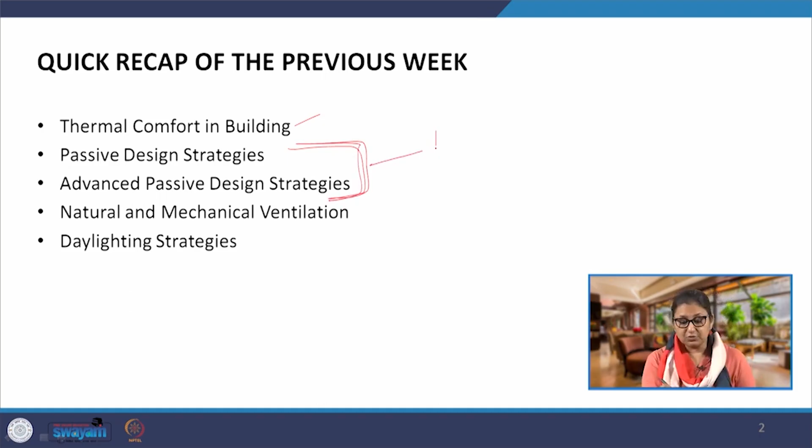Looking at the content of the previous week, we see we looked at thermal comfort, and then at passive design strategies to enhance thermal comfort. So we are talking about enhancing thermal comfort, and what will it do? It will reduce the energy consumption, which in turn will reduce the emissions.

So this is what we are talking about: we want to reduce energy consumption through building design. Now, all this is actually going into scope 2, but scope 2 is tremendous for different types of businesses and companies, as we have already seen in the previous week.

So what we were trying to do through the strategies in the previous week was reduce scope 2 emissions, which directly accrue because of the amount of electricity or different forms of energy that we use.

For example, we might be burning conventional fuel to heat up a building. That could be scope 1 if we are burning the fuel on site, but largely it is going to be scope 2 because most buildings today are run on electricity. So it is either scope 1 or 2.

Then we also looked at ventilation. If we do not have enough natural ventilation, we will be adding mechanical ventilation, or HVAC, to serve both thermal comfort and ventilation requirements. And then we have daylighting strategies. Here, if we are not designing well, we end up using artificial lighting.

All this together is giving us this: we are trying to enhance thermal comfort, visual comfort, or the indoor air quality at large. So we are trying to improve comfort inside buildings, and in the process of doing so, we are reducing the energy consumption in the building.

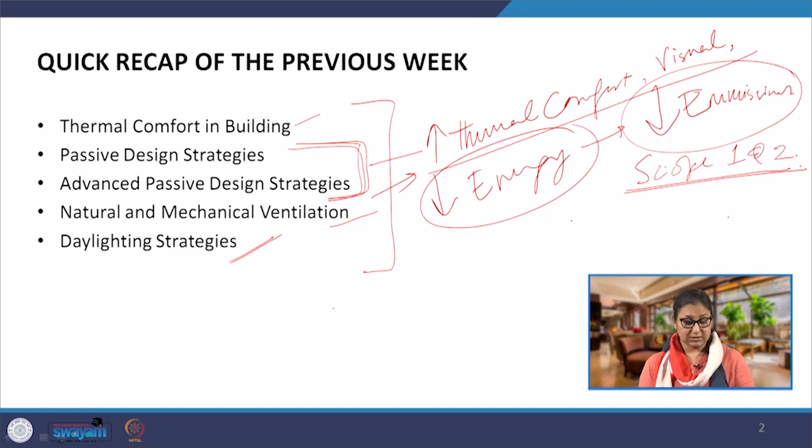But in addition to that, we are also going to see the factors which affect material selection in buildings. Now, these considerations for material selection, and when we go forward and look at low emission materials, we will largely be looking at reducing the scope 3 upstream emissions.

So these are the different materials, the choice of materials that we have. If we select materials which have high embodied energy, meaning they are associated with a higher rate of emissions, all these emissions are going to be counted as part of scope 3.

While the focus of this course is scope 1 and 2, and the calculations are largely going to be on them, we are also looking at this selection criteria of materials so that we can reduce the upstream scope 3 emissions also.

There are several factors which affect the selection of material, and we can broadly categorize them into 4 categories. The most important is the mechanical and non-mechanical considerations. We will come to the details later, but these are the primary factors for selection. Then we also have the economic consideration, which doesn't have too many factors, but primarily these two often drive the selection of materials. Which material to select? We are mainly looking at these two.

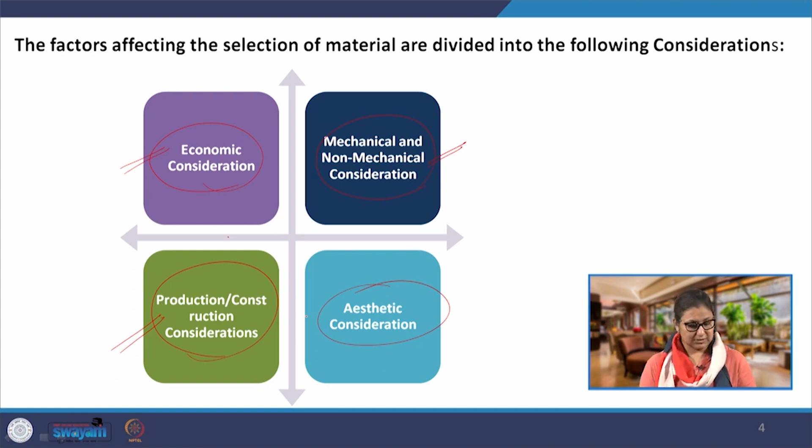If we look deeper into these factors, the most important one is such that without it the buildings cannot function well. So, what we are looking at when we say mechanical and non-mechanical considerations is that we have to check the strength, durability, what kind of maintenance requirements they have, their specifications and their performance, which could be thermal performance, visual performance, acoustic performance. When we say glass, there are varieties of glass available in the market today, but their performance, their visual performance governs which one to use. We have just seen that.

Then we are talking about maintenance. There are certain materials which require a lot of maintenance, and that is why they are not very common in use these days. A lot of materials qualify on many other criteria, but because they require a lot of maintenance, they are gradually going out of the market. People are not preferring materials which require a lot of maintenance. We will come to each of these factors in detail now, but these are some of the factors, and there could be a number of other factors we can include in this list, but these are the primary factors considered within mechanical and non-mechanical considerations.

The second one which we said is the economic consideration. Some of these factors, for example durability, affect the economic consideration too. But if we look at the two primary factors, we are looking at the capital cost of material - how much cost I am going to incur in the beginning when purchasing and procuring that material, which adds to the capital cost of my building. And then we are talking about warranty or guarantee, and this durability actually affects this.

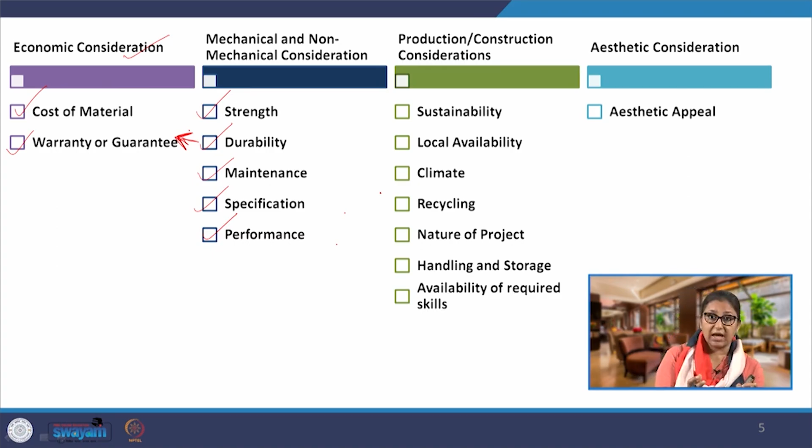If we have a durable material which is going to last 20, 30 odd years, but we have to pay a small premium for that durability, for the warranty and guarantee that comes along with the material, we might find it more economical than a material that stays only for say 2, 3 or 5 years with a slight reduction in cost. So that cost comparison is the life cycle cost of the material. The economic consideration - one could be the upfront cost charged to the person, and the other could be the life cycle cost. We are not talking about the cost of emissions and others, but only during the installation of the material - the cost for procurement of material and then for operations and maintenance. That is the life cycle cost we are looking at, and that will also be an important criteria.

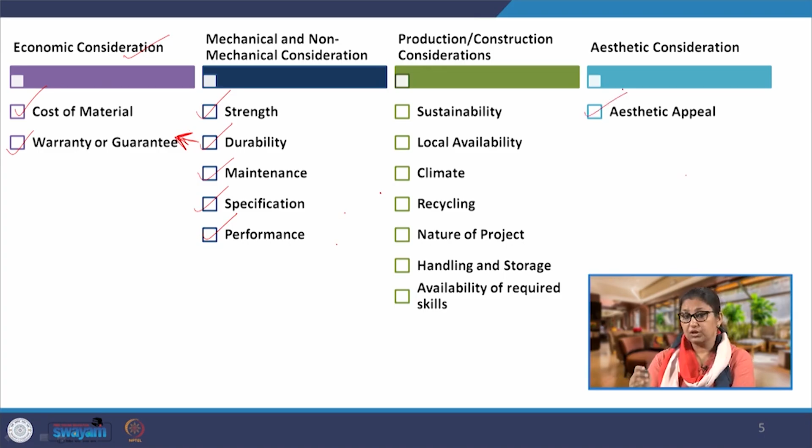Other than that, we have aesthetic consideration, which is always going to be there, but this is a subjective factor, and we can have a lot of debate over this. In fact, a lot of decisions which eventually affect sustainability and emissions are often governed by this perception of aesthetics - what is beautiful. If we go around the world, we would find that the perception of aesthetics has changed over time, it keeps changing. Earlier people would find stone clad buildings beautiful. Gradually, as we are moving forward, we are finding more and more metal clad and glass clad buildings, and they somehow seem to appeal, and that is how we are coming up with more and more such buildings.

So this perception, aesthetics, is more about what is being perceived as beautiful, aesthetically pleasing, but this will often form the fundamental basis of selection of certain materials. We have to argue that along with other considerations.

Another set of factors which are extremely important but often find neglected are the ones in the category of sustainability. Largely they drive sustainability.

For example, the local availability. If the material is locally available - and a lot of these green building rating programs advocate, they mandate the use of local materials within 500 kilometers. Now that itself is a far wide range, and we may have arguments there, but local availability reduces a lot of upstream emissions because transportation costs are significantly reduced. We have seen that a majority of total greenhouse gas emissions are because of the transport sector, since there is direct fuel burning for transporting goods. So if the products are locally available, if they are manufactured locally, we are looking at scope 3 reduction during the manufacturing process, and if we look at the entire building as a product, we are actually looking at lesser embodied energy, lesser carbon emissions upstream.

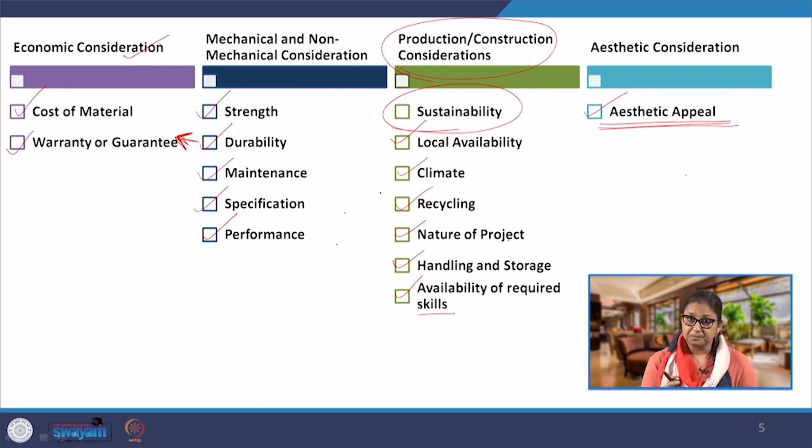So all these factors come under production or construction considerations, and we have put sustainability as a separate factor, which sometimes includes some of these factors, but other times we are actually talking about the emissions that accrue from the production of the material. So we are looking at emissions during the manufacturing process as the most significant factor under these considerations. These are broadly the factors we consider when selecting a material.

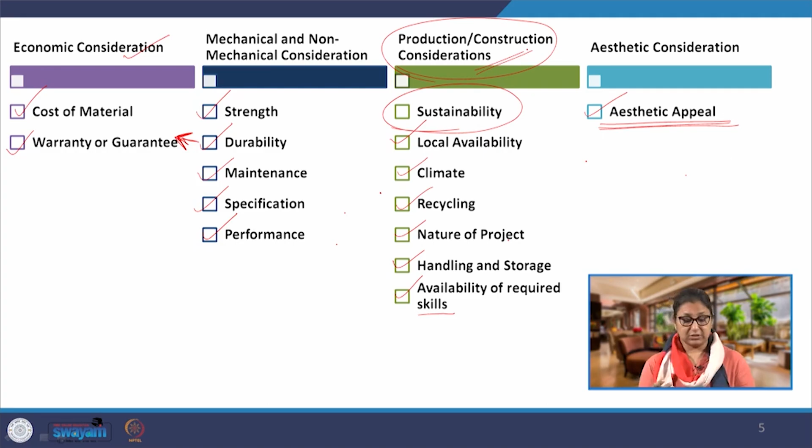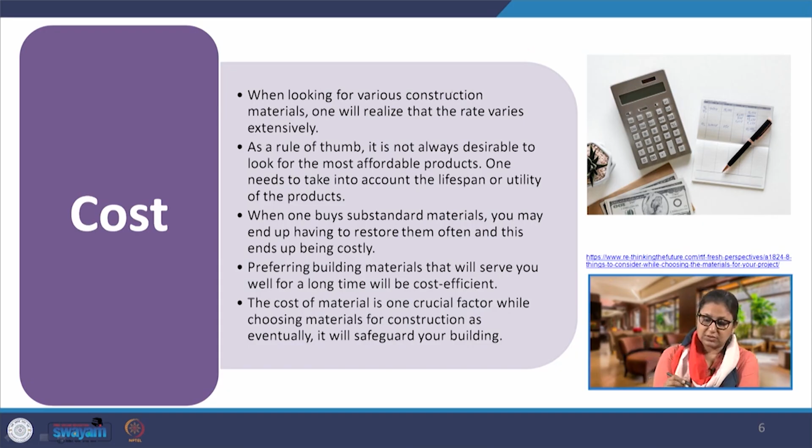Let us look at all these factors quickly. I have discussed this, I am not going to go in detail, but basically what we are looking at when we say cost is the upfront cost, which we call capital cost. So two costs we are looking at - we look at the capital cost, but at the same time we also look at cost benefit analysis.

So we look at both these things - not just the upfront capital cost, but also the cost benefit analysis, what is going to benefit me over the years. But often we neglect this cost benefit analysis because the building is being constructed by one party and it is going to be used by another party in most of the cases.

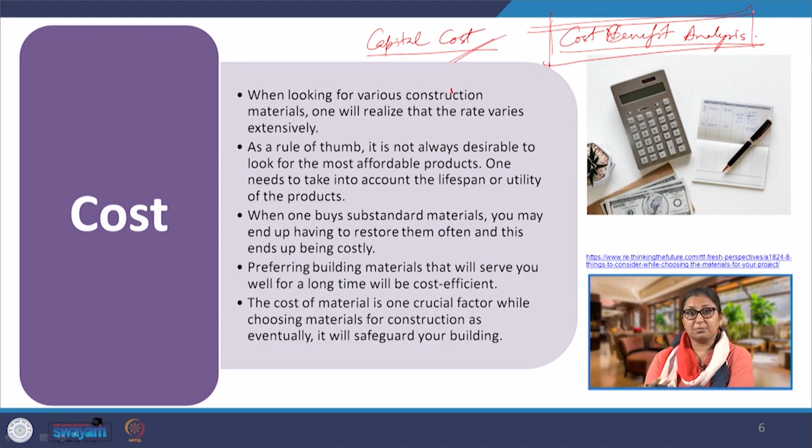Unlike residential buildings - and here I am not talking about apartment buildings, but single individually owned residences where the owner is also the client commissioning the project and is going to stay in it - that number is significantly reducing. Other than those, in the majority of cases, the party constructing these buildings is not going to be the owner. There we are talking about developers, construction companies, or real estate people.

Now for them, the capital cost is the only concern. They are not concerned whether the selection or usage of this material is going to consume more energy for maintaining a comfortable indoor environment. All they are concerned with is capital cost.

But if we have to genuinely select materials for long term benefit, then we have to look at the cost benefit analysis. This could be done in multiple ways, but one mandatory thing to do is assess its effect on energy consumption, which will give us the cost benefit analysis a lot of times. So it's the upfront cost plus the operational cost that is going to incur because of this selection. This is what we are looking at when we say cost.

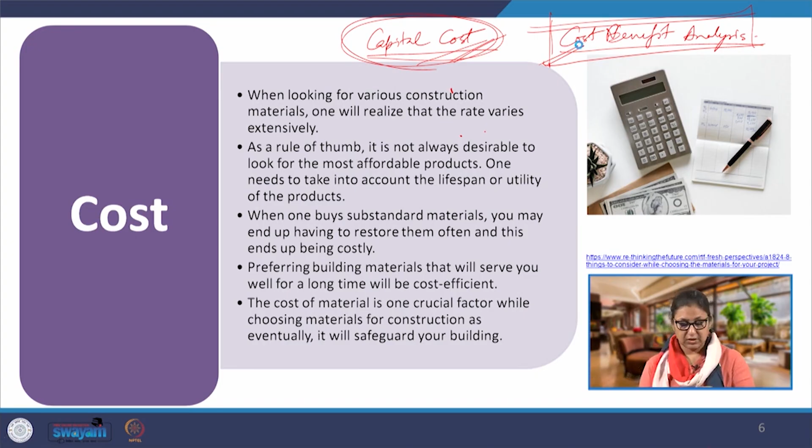And the second one within this cost consideration, the economic consideration, is warranty or guarantee - so we are talking about durability.

What is the total life of the material that we are going to use? Now, a lot of building materials, for example, the basic walling and roofing materials, often have a long lifespan. They continue to remain in use for another 50 or 80 odd years. The bricks, the stone, the concrete all have a long life.

When we say warranty or guarantee, we are talking about building materials or components which have a shorter life, such as glass or metallic sheeting. So all these materials we are going to be concerned with the warranty or guarantee that comes with them. Again, it affects the cost benefit analysis.

So if I have a material which is going to get replaced after 10 years, I will have to replace, for example, the sheeting or maybe a wooden panel, an outdoor wooden panel. That may have a shorter life when exposed to weathering, every year, every season. So that will have a shorter life.

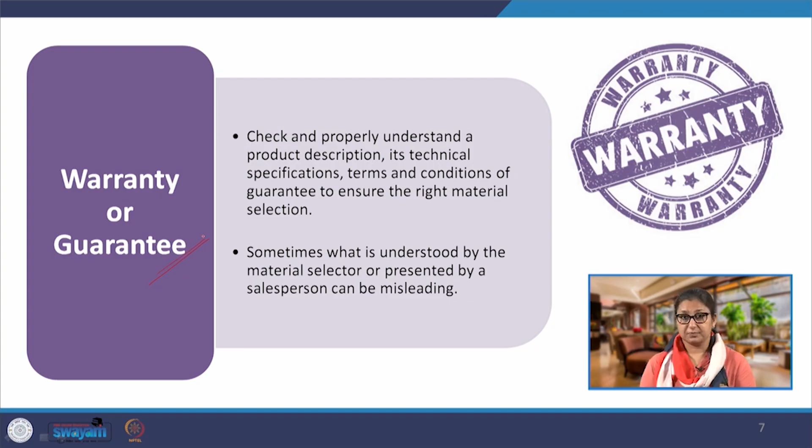How much cost I am going to incur on that, and the savings from operational savings, along with that, the life of the material tells us how much is the benefit. The next factor we move on to is mechanical and non-mechanical factors.

The most important factor that we always use is strength. Strength for various purposes. For example, if we are making a multi-storied building for residential purpose, it has a different set of requirements, different strength criteria required, compared to that of a bridge. If we have a long bridge with a long span, the two structures have different requirements for their strength purposes.

This one requires a different type of material, and this one requires a different type of material, strength being the primary criteria. Not every material can be used to make a long span bridge. It can, there are few materials that are there. Now, when we look at this, we can compare only between those materials, and we cannot say that, oh, this is a high emission material.

So we cannot compare bricks with steel when talking about bridges. Yes, we can talk about them depending upon the spans. We have seen masonry bridges for a long time, but now we move on to steel, and there are several benefits that come with steel. So when strength is a primary criteria, we compare only materials which have similar strength, and the purpose is defined, which is primarily strength.

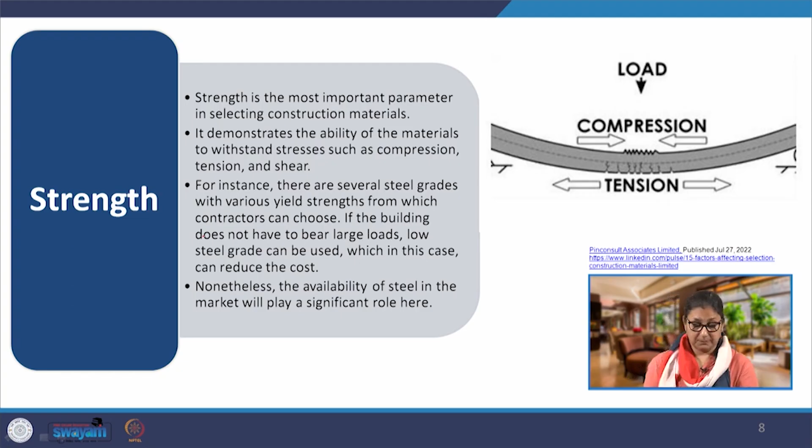Then durability. Again, we are talking about the life of this material. How long can this material serve? How durable is it? For example, if you look at materials such as brick, the fired clay brick I am talking about, if it is properly manufactured, it has a very long life.

You must have heard that the bricks from the Indus Valley civilization, from Harappa and Mohenjo-daro, were discovered, and in fact they found out there was a city because they started taking out those fired clay bricks. They continued to remain after 3000 years in such good condition that they could be used even further in buildings, in the railway track that was actually being done.

But then steel is not a material which will have such a long life like 3000 years. It will rust, it will corrode, and it will totally disintegrate. So we have to look at the durability of these materials, but we also have to see along with that the purpose for which it is being designed for.

Now, a structure surely is not required to be there for 3000 years, that long - of course 3000 is too long a time - but we look at the lifespan which is desired for a building. Residential buildings may be having a higher lifespan; commercial buildings may not require that longer lifespan because there is newness required to continue running a business.

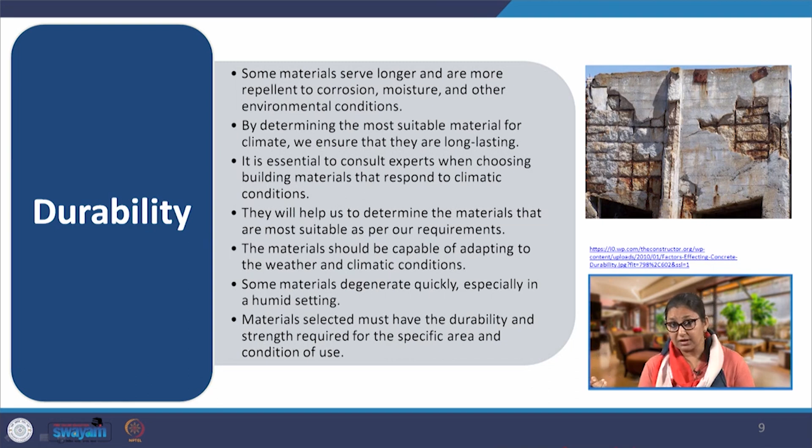We can't just say, no, I was looking for strength, so I just went ahead with steel. For the given requirement of strength, can there be other materials which have less emission factor, which are fairly durable, and have other benefits? That is what we are talking about. Then of course, maintenance - as I said, maintenance is one thing which has been a major deterrent in the use of low embodied energy or low emitting materials.

For example, the mud blocks - they are very good environmentally, they have sufficient strength as required for a single story or double storied building, but the problem is that they require a lot of maintenance. As I was just mentioning, every rainy season, after every rains, they would require to be maintained properly. It is a task. Compare that with the modern homes that we have today. We have bricks, pakka bricks, fired clay bricks, we have concrete, we have all those permanent materials. You construct a house and it does not require as much maintenance for the next 50 years, except for some painting here and there.

Compare it with steel construction, it practically requires no maintenance, again little bit of paint, and if it is properly done, if the composition is good, probably you would not require to paint it as often as you would require to paint the brick buildings. Now, maintenance therefore plays a significant role, and today as we are shifting to lifestyles which are very fast moving, and people are switching more and more from traditional jobs to white collared jobs, people have lesser time to maintain the buildings, and that is why, and also the economy supports, economic growth is supporting - we are going towards buildings which require less and less maintenance.

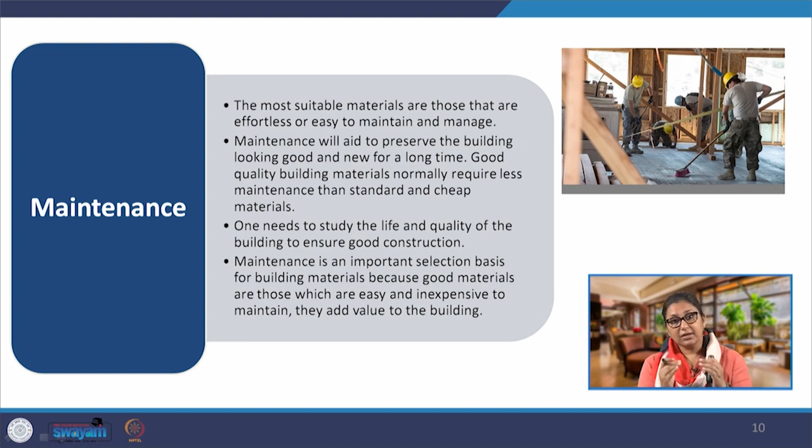Besides the social requirement of having buildings and materials which require less maintenance, there is another side of it - maintenance also costs. So there is a maintenance cost that is associated with certain materials. Every time we have to maintain, it consumes resources, either it would be consuming manpower, or material, or energy, but it consumes resources. So we want materials which require less maintenance and associated resources.

Now we are talking about the specifications, all these factors we have just discussed, the strength, the durability. How do we know which material will be suited for this purpose? A bridge which spans say 750 meters, which material to be used? We need material which will have a strength of at least this much, depending upon the design.

So we have to clearly specify when we say, okay, I need an acoustically insulated room. I am in a recording studio right now, and it is insulated from all sides. The specification for the internal cladding is that I have to have acoustic insulation in place. What options are available will then be evaluated on other parameters, but the fundamental specification has to be put in place.

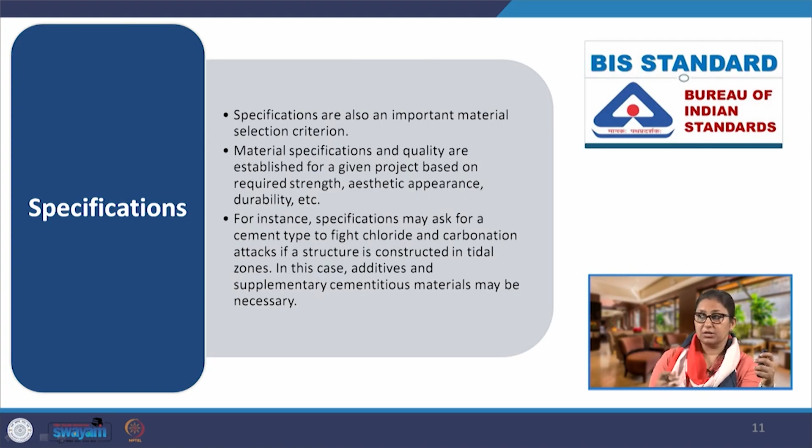In fact, this should be the first factor of all, and further some of the factors will then become important. Here it is the acoustic performance, for some other building it could be strength or durability or something else.

And then we have performance. What all performance? It could be thermal performance. Suppose we are talking about buildings in Alaska. There is probably minus 40 degree centigrade temperature outside, and indoors we would want, even if we are talking about adaptive thermal comfort, some 20 degree centigrade inside. We are talking about a temperature difference of 60 degrees from outside to inside. How do we maintain that?

So the mandatory performance requirement for the material would be that it is an insulating material, it has thermal insulation properties. That is the performance criteria and that will go as specification. I am in a recording studio, the performance criteria is that it should have this much acoustic insulation that it provides.

How much insulation should it provide? If I am having, say, an operation theatre or maybe a museum, I do not require certain wavelengths of light to be falling onto my exhibits. The colors fade, maybe it is an art gallery. So I need specifically only a limited wavelength of light to be permitted inside and the rest to be cut off. The UV is not required at all, it has to be cut off. So this is my performance criteria, and the specification would be a spectrally selective glazing.

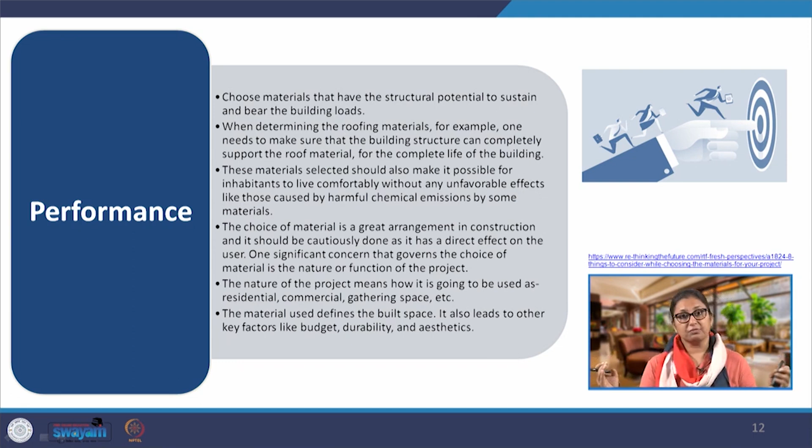So when we say performance, we are looking at specific performance criteria, and then we will frame the specifications accordingly and define the rest of the factors. Now, which factor takes precedence depends upon the context, the building that is in question.

The next category is broadly under production and construction, and whenever we talk about sustainable buildings or green buildings, we must look for materials which are locally available preferably, and there are multiple benefits of that. From the point of view of a client who owns or wants to construct the building, it will be cheaper, because there is less transportation cost.

So automatically the preference would be local materials, unless we have specific structural or performance requirements. That is from the client perspective. From the socio-economic point of view, when we mandate the use of locally available materials, what we are really doing is decentralizing the production of materials. So locally the economy would grow, but of course there are limitations to it.

We cannot produce bricks everywhere. The soil may not be of good quality everywhere. We can't produce bricks in extreme coastal areas because there is less clay available and more sand, or in deserts brick kilns cannot be established, but what can be established is probably AAC blocks, or maybe glass factories, but of course that requires water.

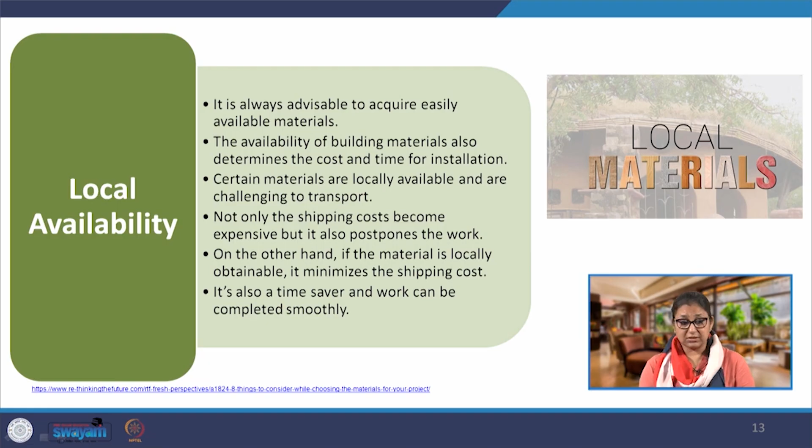The next is climate.

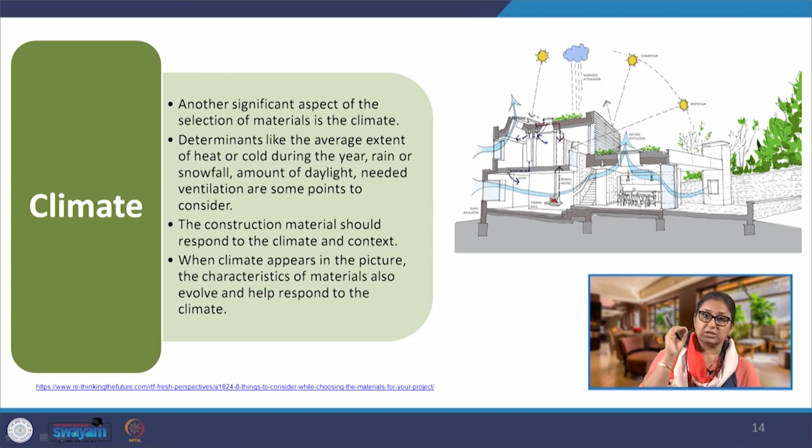We have discussed a lot about climate, and climatology is a fundamental subject in architecture, yet majority of the times when we design, we do not consider climate while selecting materials. You find metal and glass clad buildings in extremely hot dry climates, and totally enclosed buildings with no openable windows in warm humid regions, which could function well if naturally ventilated. Unfortunately, the understanding of climatic context takes a back seat when selecting materials and designing buildings. We have to put it in front and design accordingly.

A lot of this is part of sustainability, plus the emissions associated with manufacturing the material right from raw material extraction. Compare CSEB, a very low emission material, compressed stabilized earth block with 5% cement and locally available clay, which is anyway there when excavating for the foundation, and a machine which can work manually or with a little amount of energy to produce the blocks.

Compare it with glass. Here we have a lot of raw materials that have to be extracted and then transported, because we are talking about metallic additives and sand. All these raw materials will be extracted and transported, so we are talking about raw material extraction and transportation to the manufacturing site, and then the manufacturing of this material.

With CSEB, it is manufactured on site, zero transportation, and minimal energy required even if it is an automatic process. Compare it with glass, where sand will be required to be heated to about 1400 degrees centigrade to fuse and melt it into glass. We are talking about two extremes of materials, and this causes so much emission that the energy going into making this material becomes unsustainable.

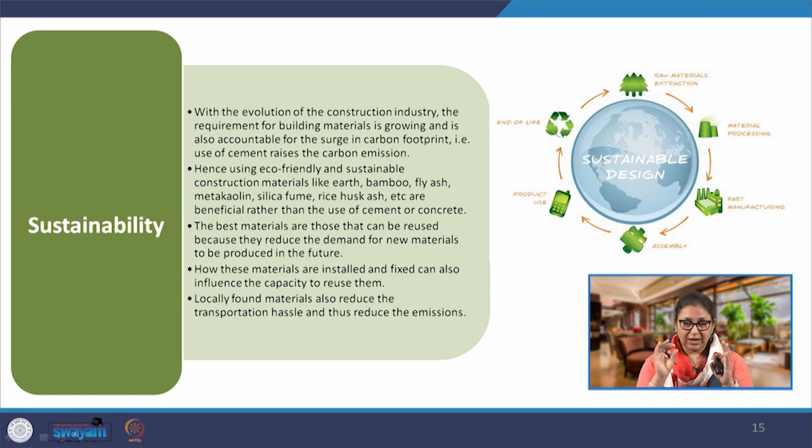So while emissions is one criteria, there are a lot of other parameters associated with the manufacturing or extraction of a material. From embodied energy or emissions point of view, stone seems environmentally more sustainable, but if we look at it holistically from environmental impact point of view, stone is not highly sustainable today. So we have to look at any material and use it after considering all the factors we have discussed.

Recyclability is one factor we can surely consider in today's times, because especially for commercial buildings, we are looking at facades which can be renewed faster, with newness maintained. So if we have materials which can be recycled and put back into usage, that is something that should be preferred.

Glass as a material, and metals for that matter, can be recycled, but the other factor is that they are associated with very high embodied energy and emissions, which we have to keep in mind even when talking about recycling. So if we look at the emissions for a recycled product, we see how much total emissions this material has.

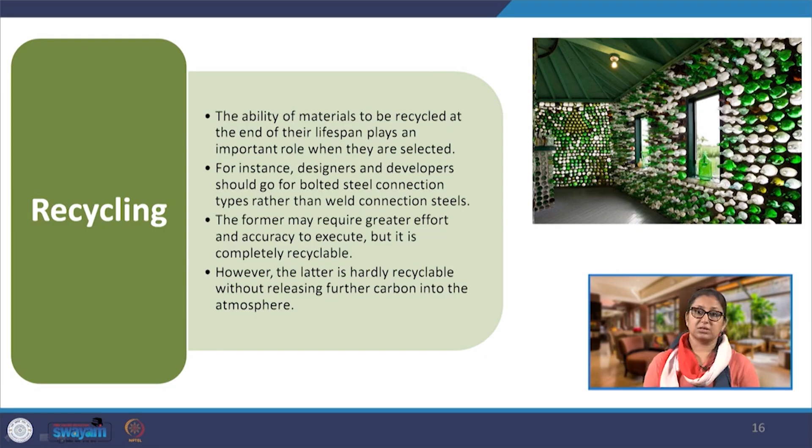If we consider a 10-year life span, it goes into recycling, another 10 years, and goes into recycling again, and another 10 years. So, we have to look at the potential for recycling for all the materials.

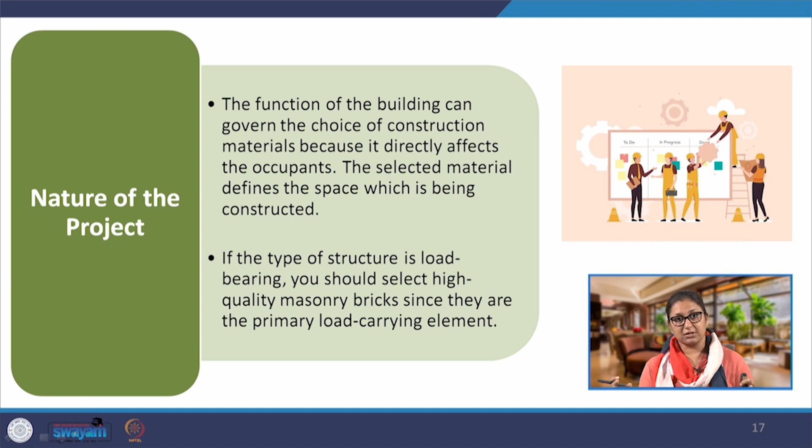Depending upon the purpose for which the building is being designed, we decide the performance criteria. As I said, I am sitting in a recording studio, so the nature of the project requires acoustically insulated rooms, no windows, no connections, just an insulated packed room. If it is a sports stadium, it is a different project altogether, needing larger spans and open areas. If it is a residential building, it is a different project requirement altogether. So, depending on the nature of the project and climate, we decide the performance criteria and parameters, and then write the specifications taking into account all the factors we are discussing.

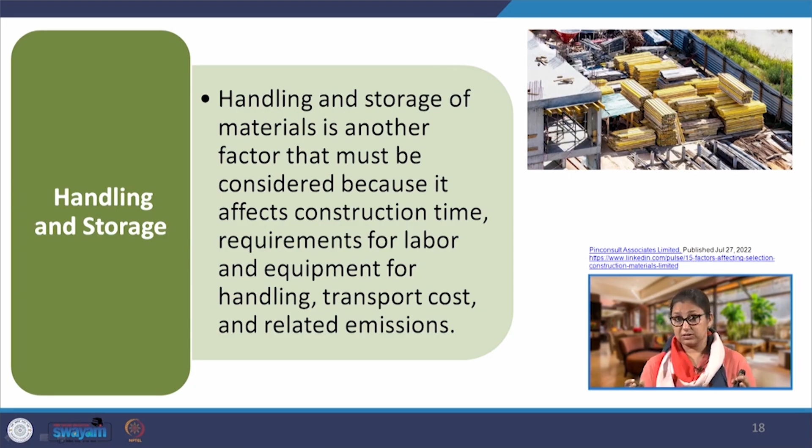Handling and storage is another factor, as it requires labor and equipment. A lot of materials could be heavy, requiring extra machinery to operate and handle them. So, we have to look at all these factors when selecting the materials.

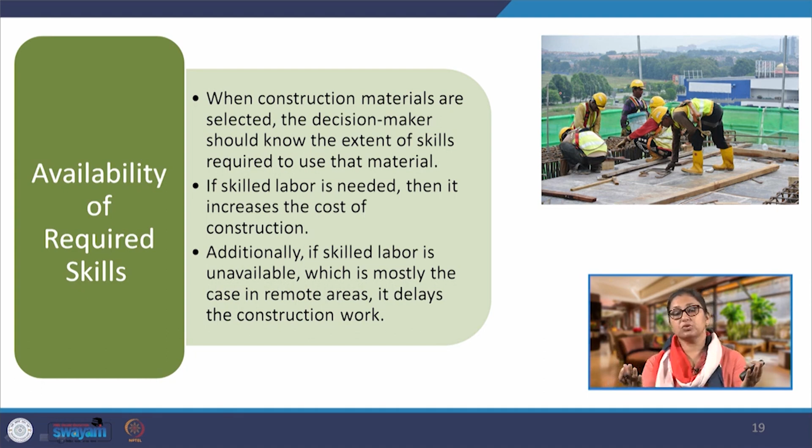And availability of required skills. Often we do not take this into account as a factor, but it automatically comes up in the cost factor, because the moment we require highly skilled labor to install or construct using a certain material, the cost goes higher. A lot of materials have also been falling out of use because skilled labor is no longer available. For example, traditional buildings would show a lot of wood carving, but as we move toward industrially manufactured materials, that skill is going away, and the people who used to do that work are no longer there. So we are seeing a shift from traditional materials to industrialized materials. As a designer or architect, we might propose certain materials, but we also have to see whether the skill is available or not.

The last factor, but not the least, is aesthetic appeal - what kind of materials are perceived as beautiful for the exteriors. If you look at traditional buildings in the hot dry, semi-arid region of northern Rajasthan, the Shekhawati part, you would see that buildings from outside were plastered with lime mortar, very smooth surfaces with paintings done on the walls. When you walk through the streets of the older Shekhawati towns, they look like open air art galleries with paintings on both sides.

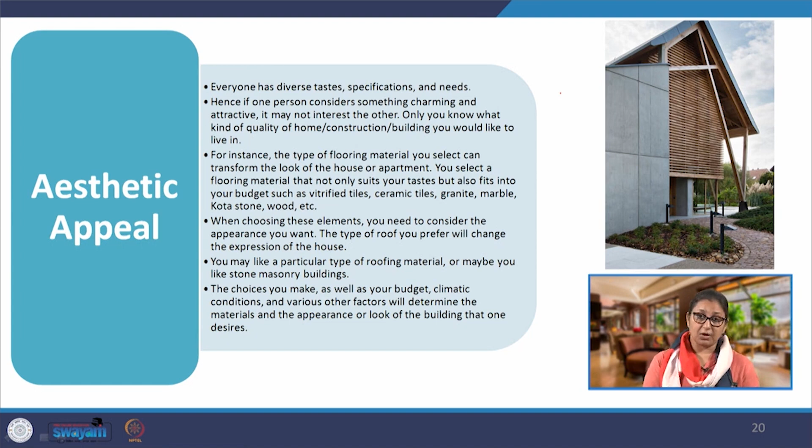That was the perception of aesthetics then, and everybody who could afford it would get their houses painted. Today we do not do that at all - there are very plain, flat looking exteriors that are perceived as beautiful. Along with the geometry and massing of the building, we also have materials which are perceived as beautiful, or sometimes not. This perception can be consciously changed. If I have a greater consideration for environmental factors, I would not want a metal-clad building, or a completely glass building, in a hot dry climate. Even if from a general perception it might look beautiful, from an informed user's perception it is not aesthetically pleasing.

This is something very important, but it can also be changed - the mind can be trained to like certain things. So we have to make the other sustainability factors more relevant, and then select materials, not purely based on the general perception of aesthetics. These are the factors that determine which materials to choose, and we have to keep all of them in mind when making a choice for materials.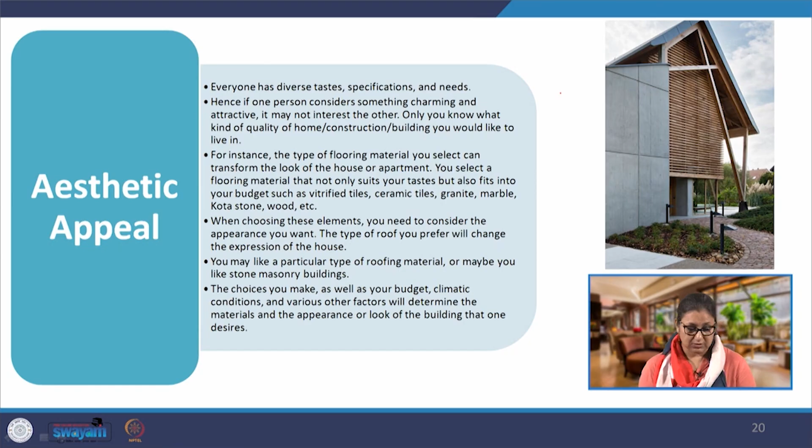I will stop here, and tomorrow we are going to look at examples of different materials for different building envelope components and even interiors - the roofs, the walls, the fenestration - and see what options we have available, and how the emissions and embodied energy for each of these materials are changing, so that we can make a conscious choice of what material to select.